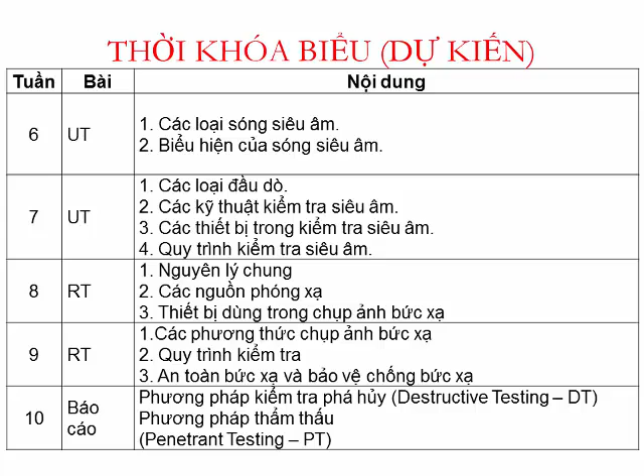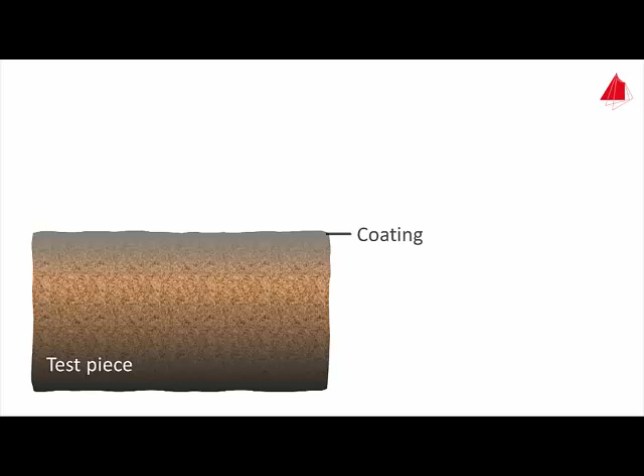Dye-penetrant examination is an important method of non-destructive testing of materials. This is the basic principle. Often the surface of a workpiece is covered with rust or paint, which masks the material defects, as shown in the sectional view. Therefore, the first step is always the pre-cleaning of the test piece surface. This must be done very thoroughly so that any defects present, here it is a crack, are open to the surface.

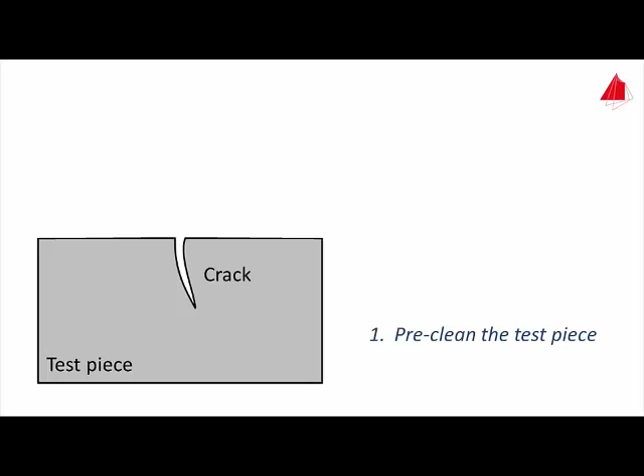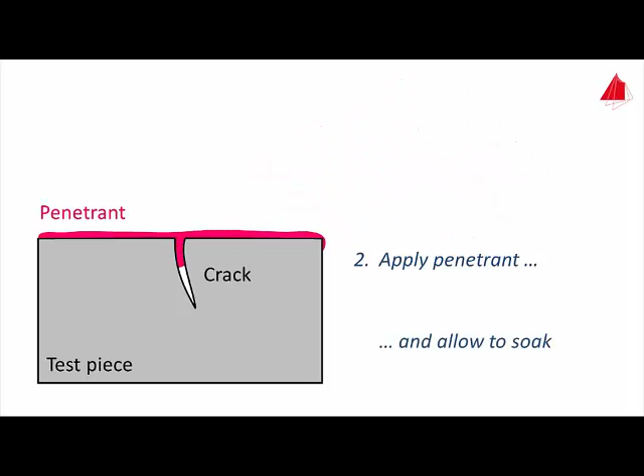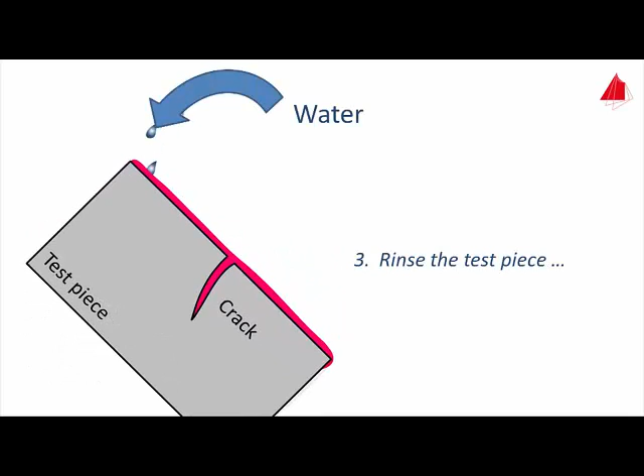In the second step, the penetrant is applied to the test piece, usually red-colored low-viscosity oil. Due to the penetrant's high surface wetting capability, it penetrates into the defects and cracks. After several minutes of dwell time, the third step is to rinse the part's surface cautiously with water. The water removes the penetrant completely from the surface, but leaves it in the crack.

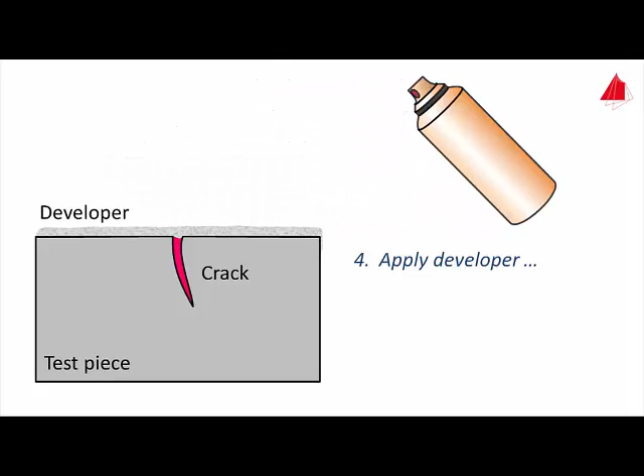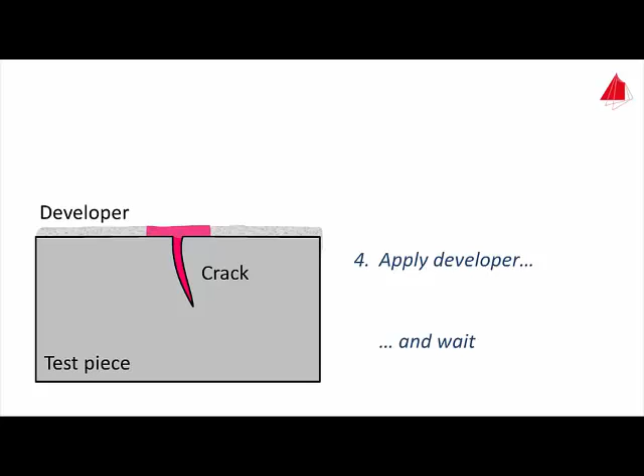Now, the fourth step. After drying the test piece, a developer is applied onto the surface. The developer is a fine-grained white powder suspended in a liquid. It forms an even coating on the surface. After drying, it draws penetrant from the crack out onto the surface. The location of the crack is indicated clearly on the surface.

Hi, my name is Mike Porter. I'm a corporate NDT Level 3 for Alta Vista Solutions, and this is part of a video training session, and we're going to be performing magnetic particle testing on a painted component. So what we're going to do is demonstrate the proper technique to perform magnetic particle testing through a layer of paint on a component.

Typical applications from ASTM E709 is a particular standard that we're working to, the American Society for Testing and Materials, and it doesn't allow you to test through paint. You need to test through uncoated surfaces. You're allowed 1 or 2 mils of paint, and then that would be acceptable. But if it's a special application like this, this particular component has about 16 mils of paint on it.

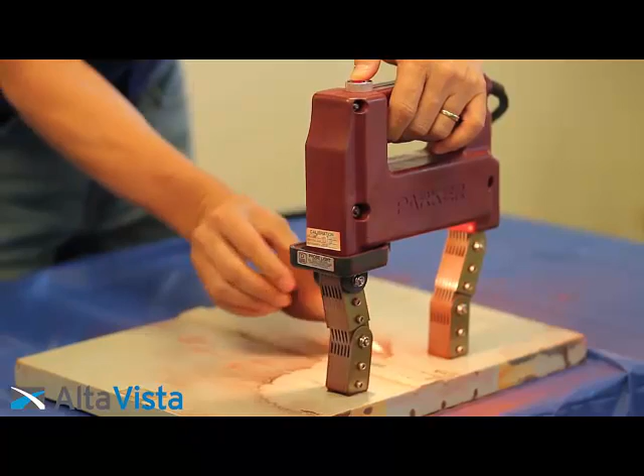As you apply the particles, you want to actually just float them on. You don't want to dump them on with a can such as that. You just want to be able to lightly float the particles on. And the same thing with a puffer. When you blow the particles away, you want to be a little tender and a little sensitive and make sure that you have the right technique.

We're going to move down across the plate, making sure that we have overlap. So I make sure that I test 100% of this particular component. I don't see anything there. I'm going to move down again. And as I apply this here, we actually start to see the formation of an indication along the toe of the weld. That happens to be about a 2-inch long crack in the heat affected zone.

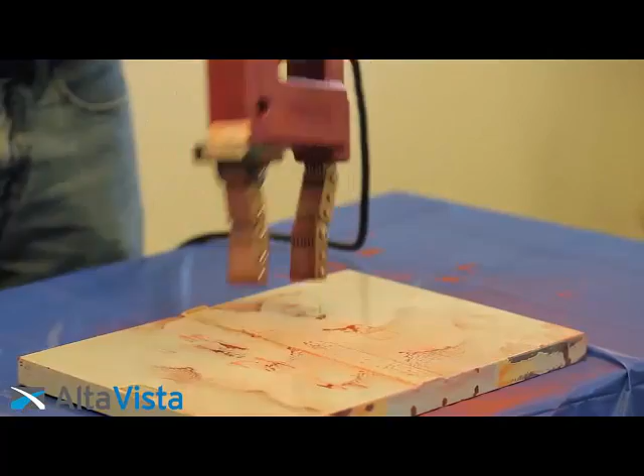So as I talked about before, it's important to know the proper technique of blowing the particles off, because if I use too much force, especially on a painted plate as opposed to an unpainted plate, I can actually blow the particles away and you no longer see the crack. So again, it's important to have the proper technique in floating the particles on and watching them form, and then also the proper particle removal with the blower.

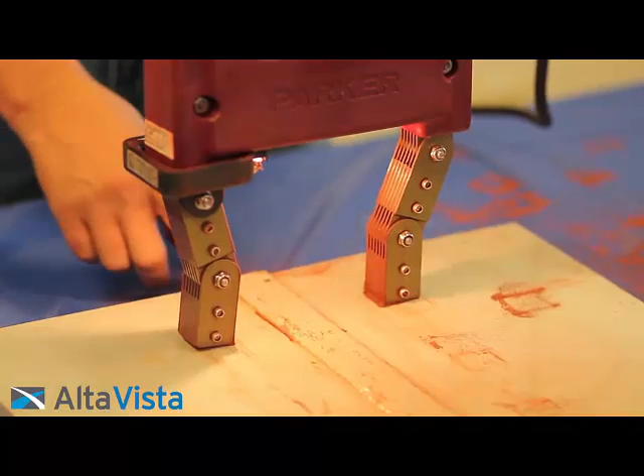So this completes this particular video training session on performing magnetic particle testing on a component that has a layer of paint.

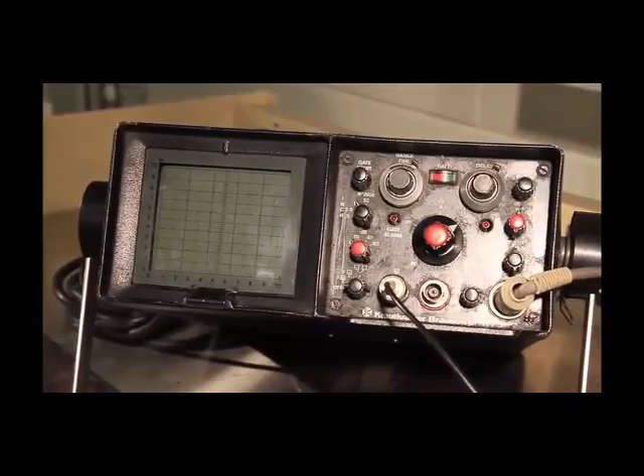Since inspection of welds using ultrasound is a leading-edge technique for finding in-weld flaws, it is important that those involved with welded fabrication have some knowledge of the method and its application. The basic ultrasonic equipment consists of a power source with CRT screen, probes, and calibration blocks.

It is usual to investigate a weld using a shear wave probe, as the angle allows the operator to stand off to the side of the weld, avoids the weld buildup, and allows the operator to select a probe angle that will strike the fusion line of the weld preparation at approximately 90 degrees, the fusion line being a likely location for in-weld flaws, such as lack of fusion or trapped inclusions. By reference to the calibration carried out on the test block, the position, length and depth of the flaw in a weld can be analysed from the data given on the CRT screen.

Accurate sizing and positioning of flaws is one of the great advantages of non-destructive testing when using ultrasound. This helps with decisions on how to facilitate a weld repair, and also defect sizing plays a critical role in the analysis of structures using fitness for purpose techniques.

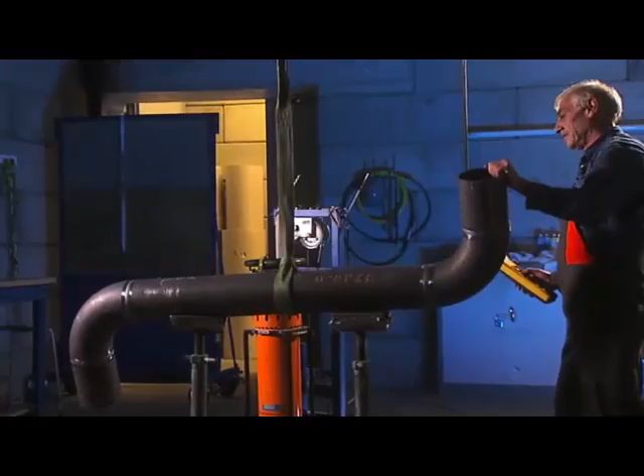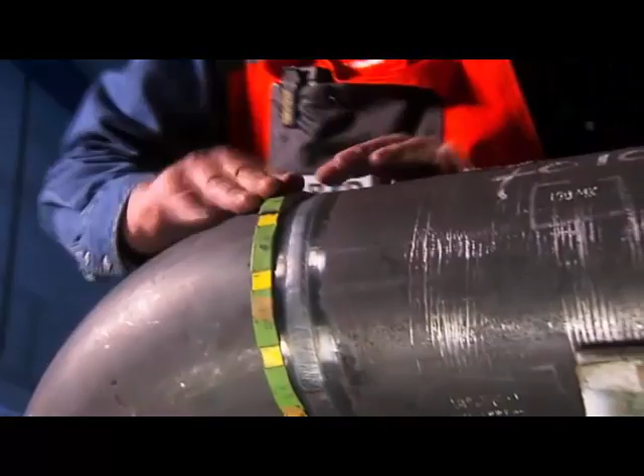Radiography testing utilizes ionizing radiation to achieve an image of an object on several different viewing media. This may be gamma rays, or as in this case, X-rays. The examiner marks the weld to be inspected with a measuring tape. This will be visible on the X-ray. Thus, he will know how to determine the exact location of possible irregularities. The film is mounted on the object, and the X-ray tube is set up carefully.

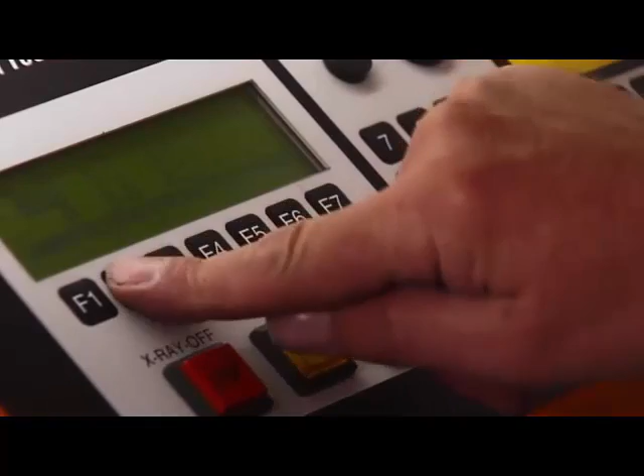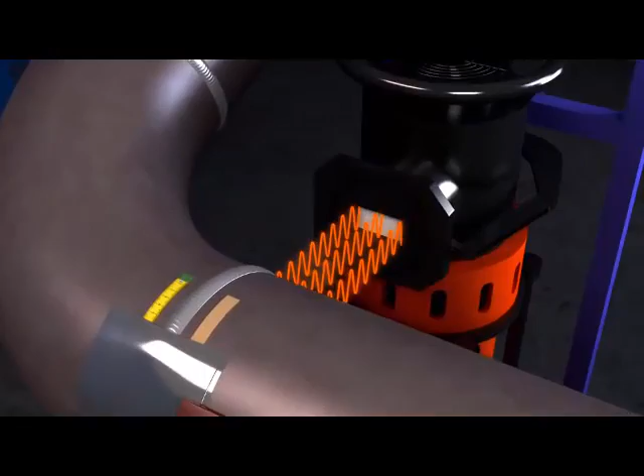The examiner leaves the area, closes the lead door, and operates the device remotely. This way, he avoids coming into contact with the radiation. He adjusts the voltage, current, and duration, depending on the investigated material and the wall thickness. Then he starts the irradiation. The X-rays go through the material and generate a radiographic image on the film or imaging plate once processed.

The experienced eye of the examiner interprets the image, and he can now determine the quality of the inspected object and if it meets the standards.

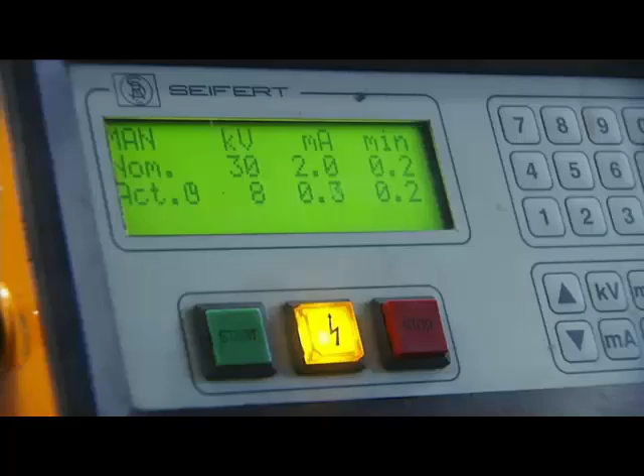X-rays can also be used to establish the authenticity of paintings, for example. Through the centuries, paint contained different quantities of lead. By exposing the paint layers to X-rays, it is possible to establish whether a cloth was repainted and the period from which the paint layers originated. In this case, the radiographic image is recorded on an imaging plate. Using the computer, a digital radiographic image is read. Art experts can use this to determine the authenticity of the painting.